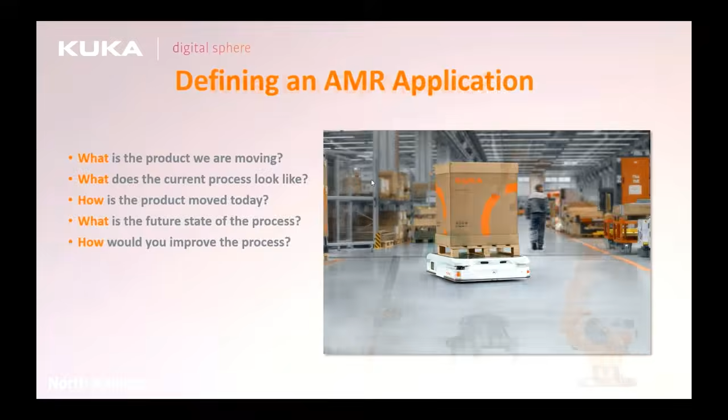So the next slide is, what is a top module? This is kind of the overarching question of the day, and hopefully I can bring some color to that. I like to refer to the top module as the end-of-arm tooling of the AMR. If you're comparing this to a six-axis robot in most cases—if I plop that on the desk in front of me and I want it to perform a task, yes, the robot can move from point A to point B, but it's not going to be able to interact with the environment and my product without that end-of-arm tooling. Some examples are suction cups, grippers, maybe even a weld torch, a three-jaw chuck, anything of that nature that's manipulating that product.

I think that's comparable to the top module of the AMR, in that the AMR can move from point A to point B, but we need that top module, or that end-of-arm tooling, to interact with my application and my product to move it around. So some of the key things I'd like to touch on: the top module is defined by the product being transported. You often want to look at what is my product, how is it being moved, what is it being presented as at the point A location, and how do I need to present it to the point B location. All of that can help define what it looks like overall. Depending how you define that top module, it can really enable the flexibility and scalability of that application—going back to future-stating the application and what is the optimal status of this application going forward, and you can define that in the top module itself.

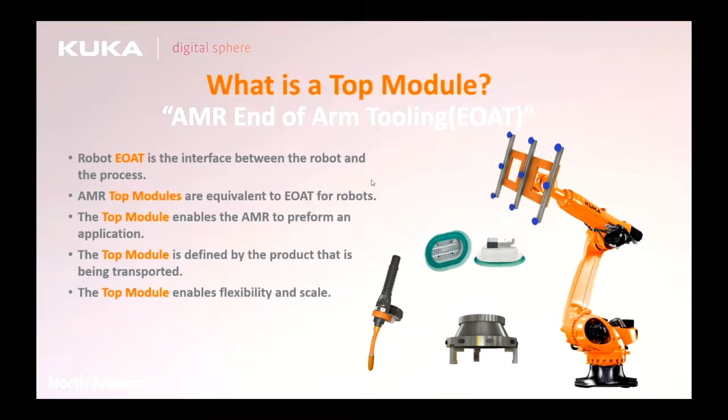So on that theme of top modules, this is what the top of most AMRs look like. Most AMRs are an open platform where you can bolt on accessories. It's an open interface where you can pull power from the AMR, have communication to the AMR, and also tap into the e-stop circuitry. If your top module is larger than the body of the AMR itself, you might want to add additional e-stops to make sure the system is safe. So the top module can e-stop the robot, and vice versa, the robot can also e-stop the top module.

A couple unique things you'll see on top here is there's also a 2D barcode scanner, or I should say a QR code scanner, so we can do some load identification for that product to make decisions based off what load we have.

One thing that's interesting here, you can see on the left-hand side you have the AMR. There's two photos there: one is the AMR in the lowered position, and the one in the top left is the AMR in the lifted position. This is a good example of how all the AMRs from KUKA specifically have an integrated lift into them. So we'll look at some applications using only the integrated lift, and then some more complex applications where we're adding more top modules to the top of that lift.

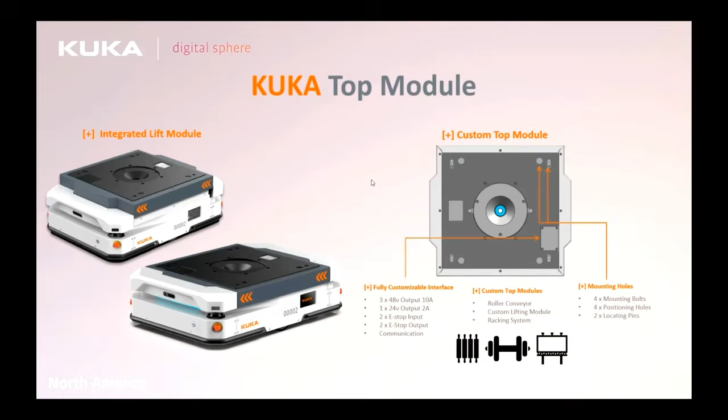Just a brief overview of the portfolio and what you'll see in the market. Most AMRs will be basically a payload capacity and also a footprint size, so you can see we cover a plethora of different payloads and footprints here.

We go all the way from 3,000 kilograms to 250 kilograms, all of which have an integrated lift in them. One thing I'll note that we'll see later in a video is the drive type of the AMR will also determine how you design that top module and how the AMR interacts with the environment. The 1500P, 600, and 250 all have a differential drive, meaning there's two drive wheels in the middle and four caster wheels in the corners, and those vehicles tend to want to drive forward and backwards. We can rotate on the spot on the center point of the unit, but the unit wants to drive forward and backwards.

Whereas the 3000P is omnidirectional, or as a lot of people like to call it, crab walking, in that it can drive forwards, backwards, sideways, diagonal, and everything in between. That can unlock different applications like side loading conveyors or doing more complicated joining processes, or even using those AMRs in tandem mode where we can drive two of them together programmatically linked to follow each other, which we'll see a video of shortly.

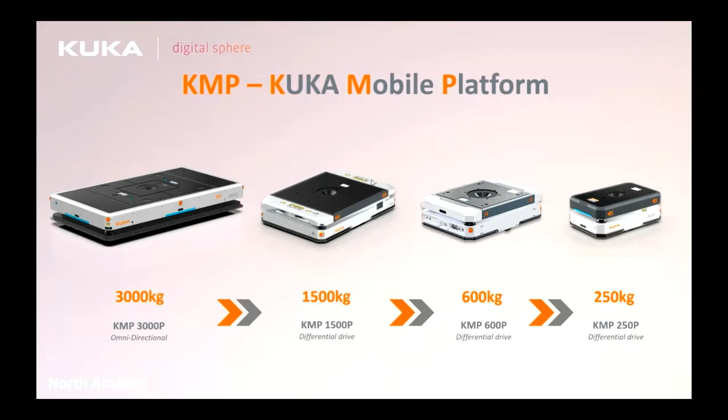So let's dive into the first video here and the first use case application. In this example, we're using a KMP 1500P with the integrated lift. You'll see there's a large base on top of that as well, which I'll discuss in a second. But this is kind of the bread and butter of AMRs in that we're driving into a stand using the integrated top module, lifting the product off that stand and delivering it to the next location or next process.

In this case, this was a manufacturing process in which we're swapping some stamped sheet metal parts. What's nice about this one is as this AMR is leaving with the empty container of goods, the next full container is already waiting behind it on the next AMR.

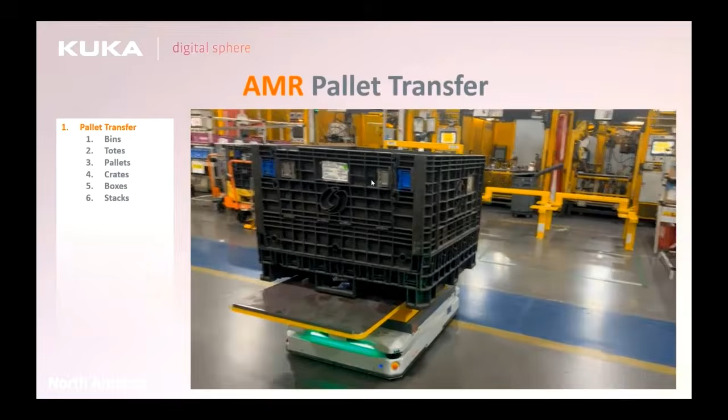Again, when we're looking at the top module and the tooling, this customer needed tooling that could accept up to 20 plus different bin sizes and types. So that's why you can see there's a large plate on top here to accept those various bin sizes. I think this is a very good example of a very non-complex top module that's able to be very flexible for the application.

So oftentimes when people think, okay, I have 5, 10, 15, and in this example 20 plus bin types, how in the world would I be able to move all of those with one AMR? I think sometimes you can simplify that down to: if I just put a base plate that's big enough to encapsulate all of those bin types, I can use that larger base plate on the standard AMR and be able to move those.

What's nice about this video as well, it's not running in this exact example, but we have two stationary stands on the right-hand side, and then that third stand on the left-hand side is actually a tilt stand.

So again, the AMR is delivering to it with the standard top module, but then you can use the stand itself to pivot down and present the parts at roughly a 30 to 45 degree angle for the operators to reach those parts. All of those are consistent heights across the lines in this facility.

So this top module, if we're looking at the left-hand side here, is very good for bins, totes, pallets, crates, boxes, anything with that square footprint that we're picking up from point A to point B.

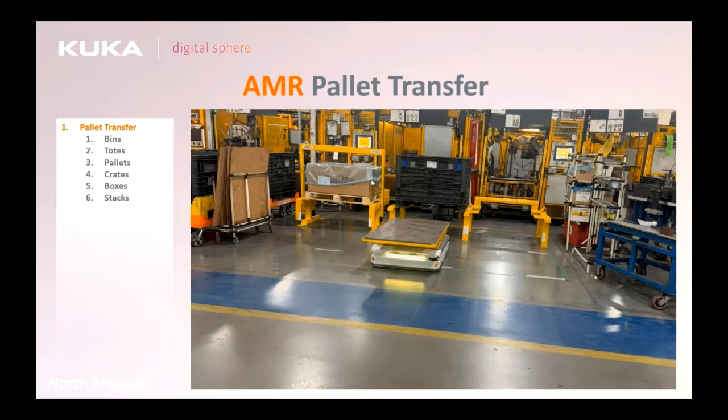A couple more examples of a similar idea. In this example, the top module for this customer was actually a very simple one where they had some plywood laying around, so they bolted the plywood to the top of the AMR. That's big enough to encapsulate all of their different pallet types. So again, a very simple solution, but it shows how flexible it is for the environment.

And you'll see here, this company is using these in combination with many dozen forklifts, to start to reduce some of that forklift traffic and become more automated.

And you'll see this is a very similar example, like I mentioned in the last video, where we're dropping to a stand. In this case, it's a wood pallet as opposed to the plastic bin that we saw in the last example.

So you see, as we drop it off, the forklift operator at the dock immediately gets a signal that says, I need to pick that up. So you'll see him come swoop in. This gets scanned by the local team member here, and then the forklift comes in to pick it up. So you can see kind of the seamless handoff there in that application.

Again, you can see the top module for this is a simple plywood base, just something enough to encapsulate their pallets for the application.

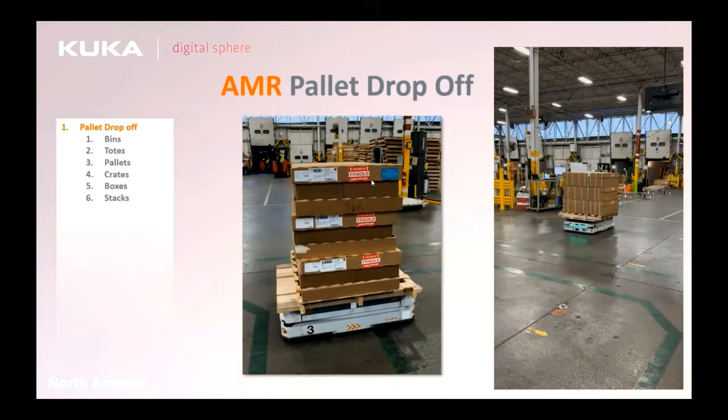This is actually from the same application, but on the front end of the pickup side. So what we just saw was the drop off at the warehouse, but this is picking up from the warehouse and dropping off at the dock.

So what we're showing here is keeping those forklifts in the warehouse and dock area and not having them do those long distance travels in between, which is typically a non-value added task for the forklift. So they get their scans, they get their jobs, they pick it from the warehouse, they drop it to these intermediate stands. Then the AMR is doing that long haul delivery from the intermediate stand to the dock doors to be loaded into the truck.

Again, a very simple top module in this case, using the lift deck that's integrated onto the AMR, bolting on an additional plate, which in this case was a simple plywood solution, in order for them to be able to lift that product.

A couple other different examples of kind of the same idea. On the left-hand side there, you can see we're using the integrated lift just as before, picking it up from stands, delivering to another stand.

But in this case, you can see that the product is much larger than the AMR. So I wanted to note that the product is not limited to the size of the AMR. Obviously we want to pay attention to the center of gravity, the load stability, the overall payload, and things of that nature. But as long as all of those details fall within the spec of the AMR, we can lift those from the stand and deliver them from point A to point B.

And then on the right-hand side is a little bit more complicated task in which we're not dropping off into a stand, but into a fixture that then gets rotated around. This is basically a weld table, gets rotated 180 degrees. The part gets welded and it gets rotated 180 back, and then we pick that finished good off of here.

So this is a good example, again, using that lift deck. In this example, we're not lifting from a stand, but from a fixture. Just to get the ideas and juices flowing: as long as I need to put the product in a location and then pick the product from the location, it doesn't have to be that stationary stand bolted in the ground. It can be a fixture, it can be a cart, it can be a rack, and we'll talk about a couple more of those things as we go through this.

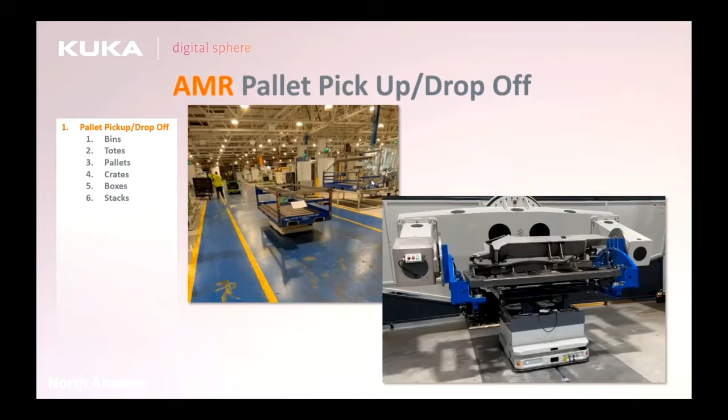So moving to a roller conveyor. This one is taking advantage of the power, communications, and e-stop circuitry that I mentioned earlier on board, combining that into a full powered roller system.

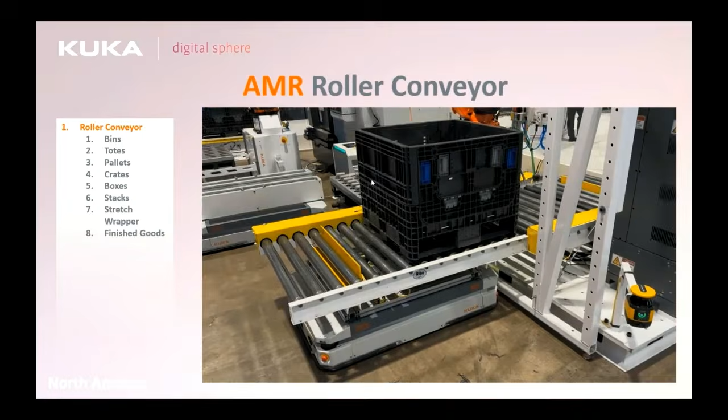In this example, the AMR is powering the rollers, controlling the rollers, docking to this other station and telling those rollers to turn on to accept the product. Then vice versa on the back end, we would dock to a similar conveyor and the product would roll onto us. This is very good for end of line finished goods, specifically in packaging and bottling, where there's lots of conveyor and product moving quickly. We can mate directly to that conveyor, receive the product, and push it off into its next state, whether that's a stretch wrapper or finished good or the next step in the process.

What's interesting here, and I like that the video stops right here, is recall the differential drive I mentioned earlier. In this AMR example, a 1500P, it wants to drive forwards and backwards, so the conveyor is mounted in this direction to mate with the other conveyor forward and reverse backward. However, with the KMP 3000, which is omnidirectional, you could rotate this conveyor 90 degrees and drive up into the mating conveyor. We could side shift 90 degrees, convey multiple products on, then side shift off and move to the next one. This adds that additional layer of flexibility with the 3000 and omnidirectional driving.

This application is really good for, similar to the last application, bins, totes, pallets, crates, things of that nature, and also the stretch wrapper and finished good deliveries.

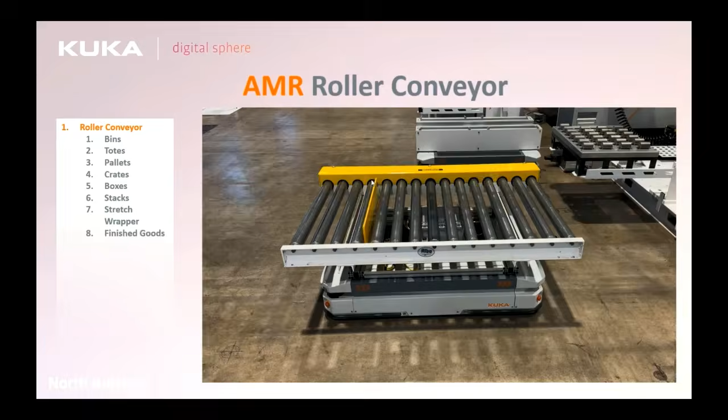So next we have the AMR rack delivery. This is similar to the application we looked at earlier, where you go into the stand and pick the product off of the stand. But in this example, we're actually taking the entire rack or product and stand with us. This gives you more flexibility in your environment where you don't have to bolt things rigid to the floor; you can take this entire thing from point A to point B.

This is very good for boxes, totes, small pieces, assemblies, and kitting type things, where you are taking this from the store or warehouse and delivering it to the line to be consumed at the line.

This is very good in that you have the operator who is typically filling these totes and bins at the store location, who would otherwise drive 5-10 minutes to the line to make the delivery, then 5-10 minutes back with the empty to be replenished. But using the AMR in this example, you can keep that operator at the warehouse doing his filling, keep the other line side operator at the line doing his value-added tasks, while the AMRs are doing that pickup and delivery from point A to point B.

Now, one thing not shown in this video, but I do like to touch on, is that this cart is not shown with wheels on it, but we can also do carts on wheels, adding an additional layer of flexibility in that we can drop off a wheeled cart near the line, and the operator can pull that cart closer to the line to perform his task, or maybe use it to make some sort of interface into the line, then pull it away, put it back towards the aisle, and the AMR can pick that up as a flexible solution.

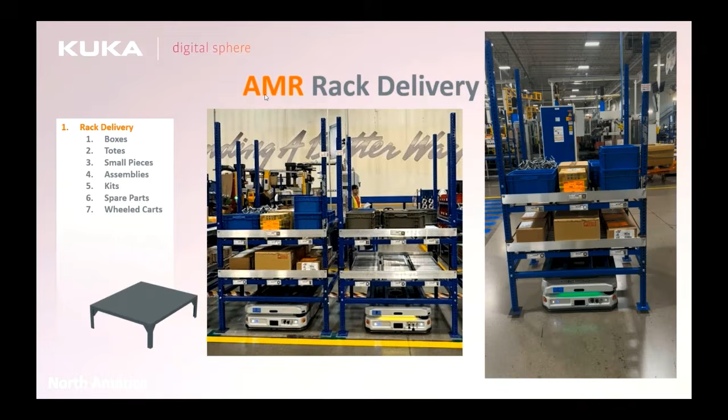Next is a creative solution here. I mentioned earlier how the KMP 3000P can be both omnidirectional and used in tandem. This is a very good application where we're moving long lumber, I want to say 24-foot long lumber, on a wheeled cart. So we're doing several different applications here: a lifting application, the tandem application, it's OmniMove, and there's a cart on wheels, and all of that's being manipulated by the AMRs.

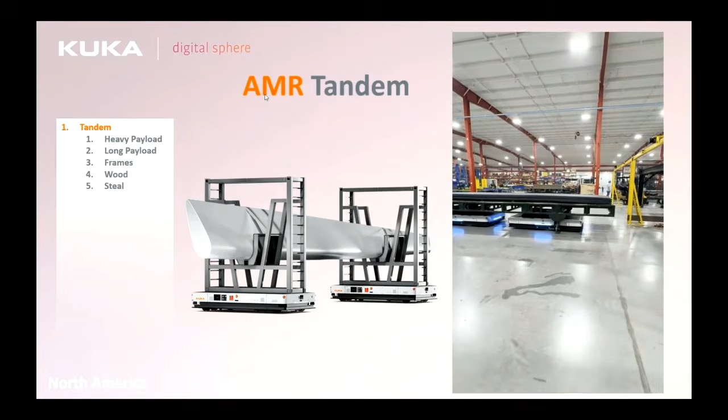This top module is both one that can be moved by the AMR and by operators for other parts in the process. Having that tandem flexibility gives us the capability to move these long and large loads.

We pick it up for one process, travel omnidirectionally to the next process, and then feed this into the assembly line for the parts to be picked. This solution and these top modules are very good for heavy payloads, long payloads, frames, wood, steel, and larger structures throughout the process.

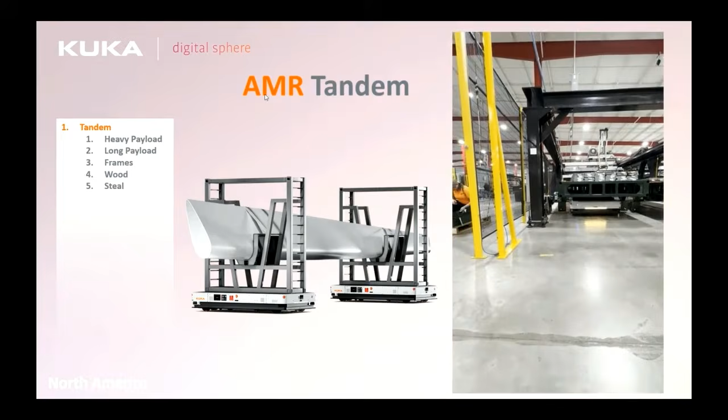We're seeing this more and more specifically in the automotive space, doing full frame moving. AMRs have typically handled pieces—moving kits, bolts, small parts, stamped sheet metal, small weldments. Now we're moving into how we move the entire frame, maybe the battery assembly, and how we merge those two things and move an entire assembly to the next process.

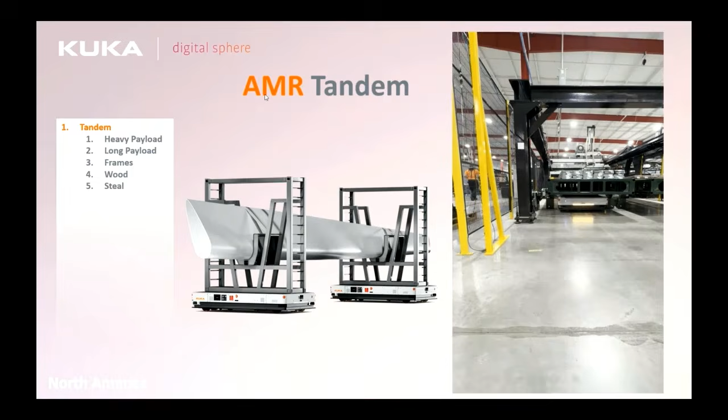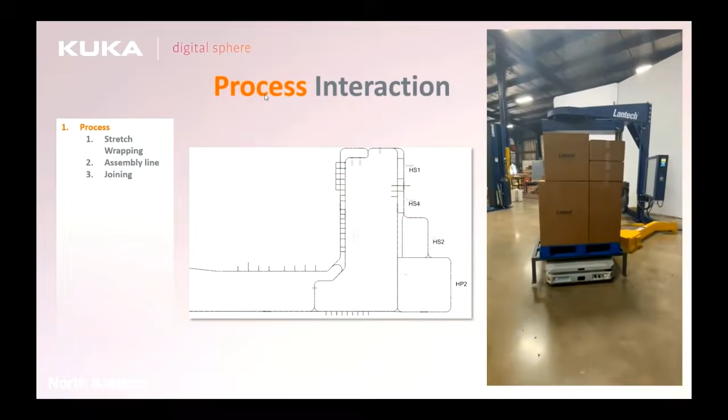Next example here is what I call process interaction. Everything we've looked at so far is really picking up something at point A and delivering it to point B. But with the AMR and its embedded top modules, you can also use them for the application itself. In this case, the AMR is staying with the product.

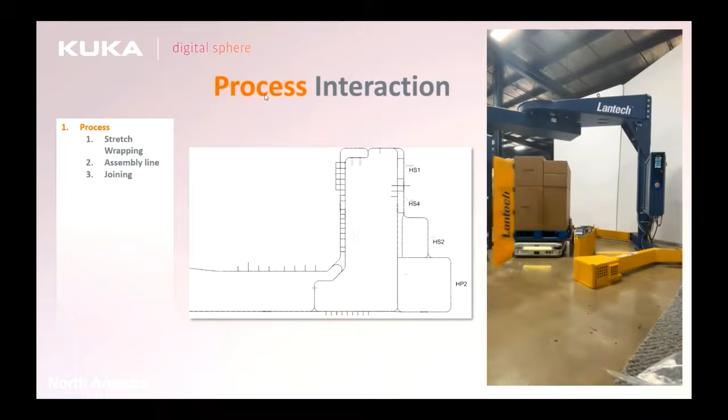We are delivering it to a stretch wrapper. The stretch wrapper does the wrapping, and then we go on to the next process. We're seeing more and more applications where the AMR becomes part of the process itself, as opposed to being a glue in between different processes. This is one good example of a stretch wrapper.

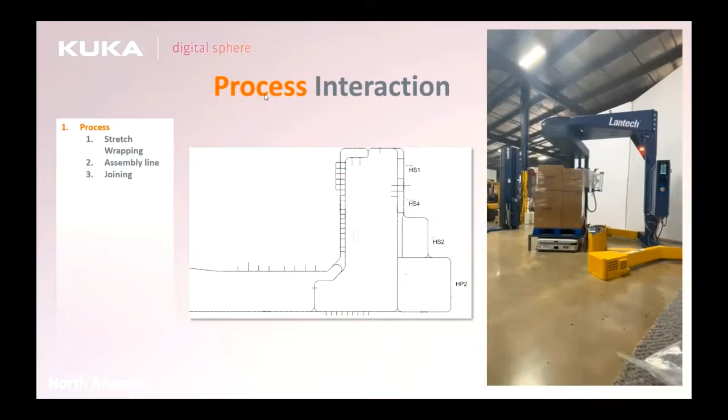There are other examples where maybe we pull it up to a station and there's some assembly being done. We're seeing more applications now where the AMR itself is becoming the assembly line. Think about, in the olden days with the Model T, moving down the conveyor track with operators doing work on it one by one—but that's not a very flexible solution. We're seeing more applications where we use the AMR as the conveyor down the assembly line.

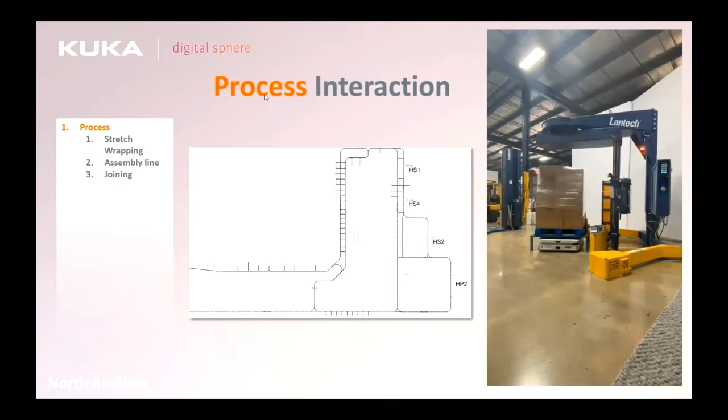Nowadays, we're seeing more flexible assembly lines where instead of one rigid line, you have a lot of different offshoots along that line, allowing different options, different specs, or different SKUs to be produced throughout the assembly line. The AMR gives you the flexibility to navigate those spider webs of opportunities to get to that finish line.

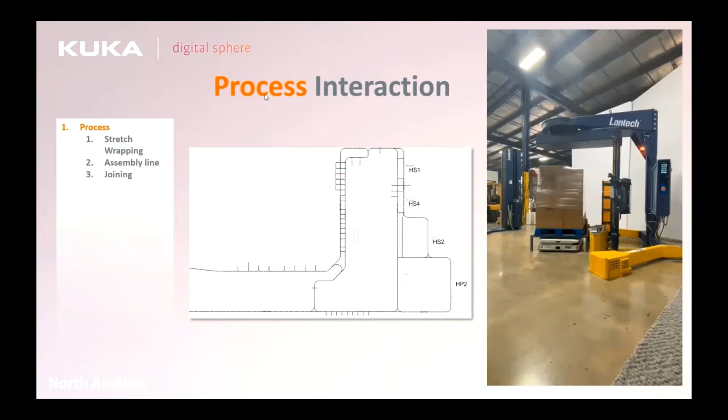And with that, I think that is all I had on the top module side of it. I appreciate everyone's time today, and I think we will open it up to some questions.